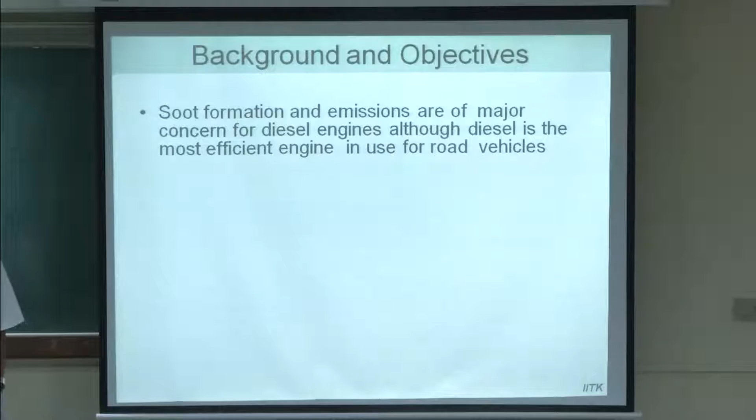You must be hearing or reading in the papers that the Supreme Court banned diesel taxis, and earlier they banned registration of new diesel cars in Delhi. So there is something real and something kind of paranoia about diesel engines, that they are so bad that you have to ban them. And the major consideration is the particulates or emissions.

Soot is of course combustion generated, but the total particulate structure is a little different. A lot of other things get absorbed due to condensation as the temperature of the burned exhaust gases decreases. So hydrocarbons, including some sulfates if the fuel has got sulfur, they all get condensed on the soot core, and that is what we call particulate - the pollutant which the public is exposed to.

But diesel is the most efficient engine available today to the people. Some of you who are aware of engines know its brake thermal efficiency of about 45% is supposed to be very high. No other engine has that kind of brake thermal efficiency. But you would be interested to know that some super heavy truck engines are being developed in America.

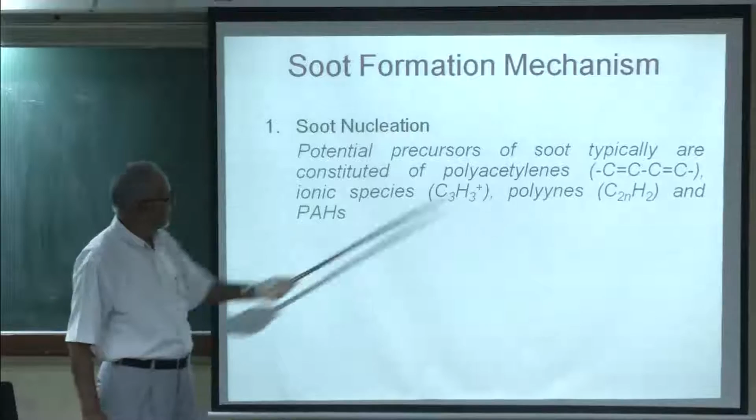So that has to form, and the potential precursors for that are typically polyacetylenes - this structure. Then species like this, many species, polyynes, and also polyaromatic hydrocarbons. Polyaromatic hydrocarbons are, say, more than 2 benzene rings.

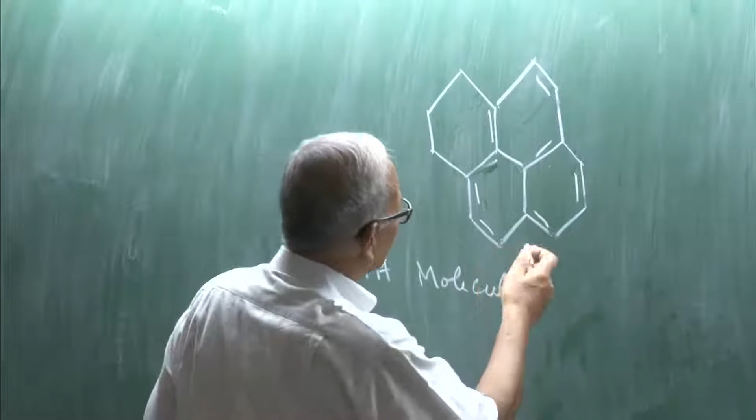So this is one typical PAH molecule. You have to have the benzene ring structure, with benzene rings fused together. Inside you will have only carbon atoms, and only outside do you have hydrogen attached. So when a few hundred rings like this are fused together, it forms the nuclei. But that's one theory, and it has been seen that some studies produce this kind of particle.

The next stage is coagulation. These nuclei, at high temperatures of more than about 3000 to 3500 degrees Kelvin, are in a semi-solid state, so they can coagulate together - two semi-solid particles coming together, and then they coalesce. So that's one stage.

Then the third stage is surface growth. Having become a nuclei, a couple of nuclei fuse together to make a little bigger particle. Now this surface grows, meaning more and more material is deposited on it. The proposed mechanism is the HACA mechanism - hydrogen abstraction and C2H2, meaning acetylene, addition. This mechanism has been proposed as possibly the most prominent mechanism for surface growth.

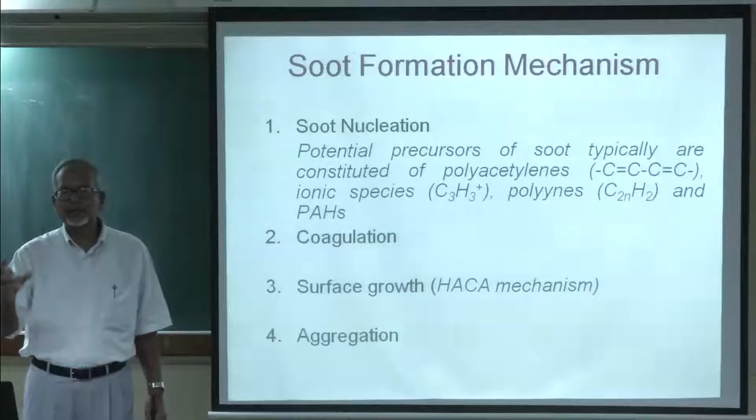Then the next stage is aggregation. Now these particles, called primary particles, may be anything from 15 to 30 nanometers in size - from a nuclei that has grown through coagulation or surface growth, and becomes a stable primary particle. It can be independent, or they can also aggregate together, a number of them, maybe 30, 40, or up to 100 particles. These together are known as aggregates.

And then, if the temperature of the gas is high - in diesel engines or even in leaner flames, excess oxygen is always available - so the soot can also oxidize, or it does oxidize. So this is the other mechanism which, in fact, continues throughout the process.

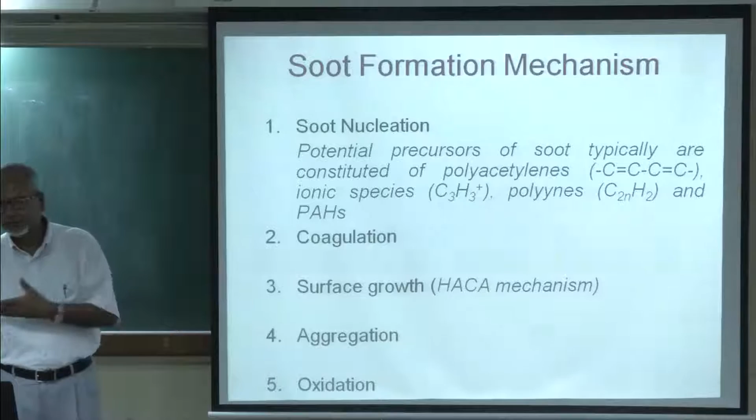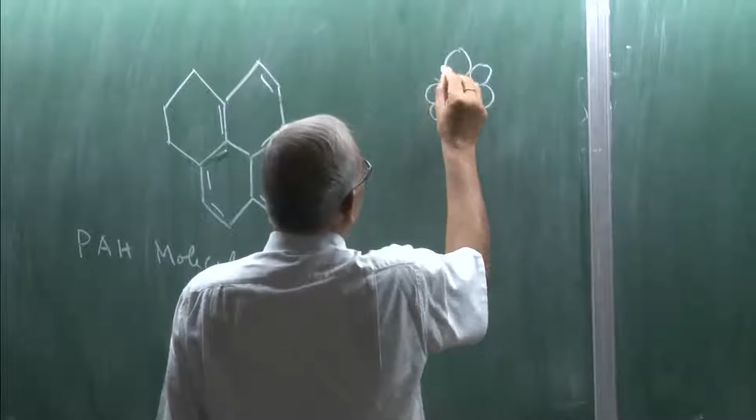We will discuss that physically you obtain a structure like this in the soot, and note that these particles should be aggregating something like this. In soot you don't get this kind of aggregation. It's chain like.

What is the HACA mechanism? Briefly, it is composed of 3 steps. First reaction is that a hydrogen atom is removed from an aromatic molecule, say suppose you have benzene in the high temperature region.

You have now the course of combustion, and so many softwares you must have been talked about, or some of you might have been using Chemkin and whatnot, that in the high temperature region of combustion of hydrocarbons and air, you have a lot of radicals and also atomic hydrogen, atomic oxygen, atomic nitrogen. These all chemical species are present.

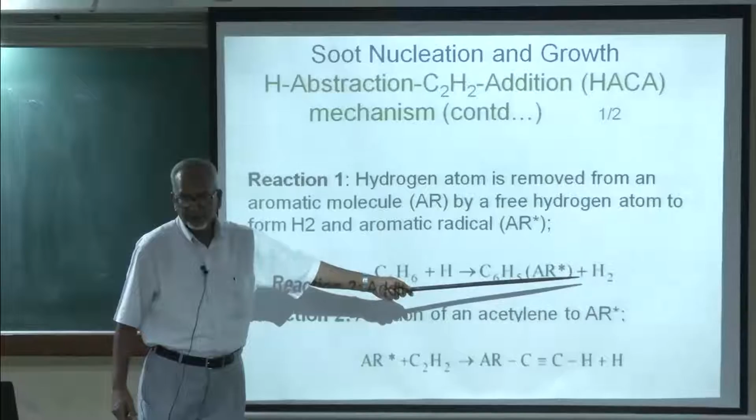So this, for example, atomic hydrogen reacts with benzene, strips one hydrogen atom from here, forms a radical. This is known as aromatic radical, or can be aryl radical, and then molecular hydrogen - this is the first step.

Second step is this aromatic radical combines with acetylene, which is formed due to cracking of the fuel molecules in combustion, and forms a substance on the side chain of the benzene ring. You will have acetylene attached, and again it releases the hydrogen atom.

So this can keep on being used again for further step 1, reaction number 1. Then the third step is that this can - you have this formed, then this is added with another acetylene molecule, another one, and then forms another ring, on which this site has a valency available, and further aggregation or further deposition starts here.

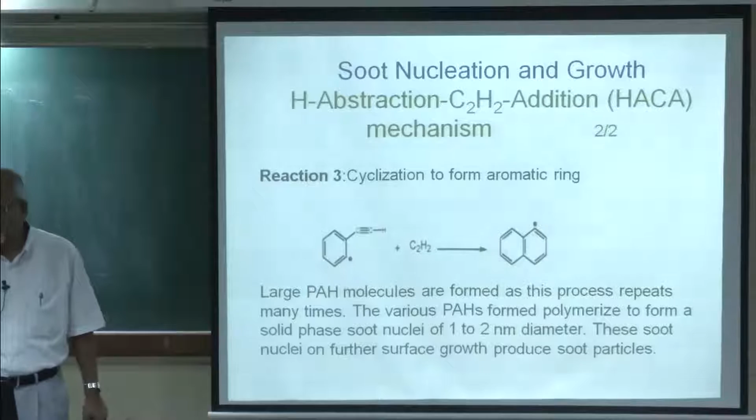So these are 2 benzene rings, then 3 and 4 and 5 and more. So PAHs are formed, and these PAHs when they become larger and larger molecules, then this becomes the soot nuclei. This is the mechanism known as the HACA mechanism of surface growth.

Other things are more mechanical in nature and not chemical, like coagulation and then aggregation. Those other 2 steps are more like mechanical in nature, that okay, 2 semi-solid substances when they collide, then you can call it at best physical chemistry, or physics.

So they collide together and form one entity, and once they get a little solidified, then aggregation happens only - one attaches to the other, then a third attaches, then a fourth attaches, and all that, forming a chain. Once they become stable and temperature comes down.

What does the oxidation mechanism consist of? It has been hypothesized that oxidation of soot can happen by molecular oxygen, or also atomic oxygen, which is present in the high temperature gases. But it has been seen that oxidation by OH radical is very important in the fuel rich regions, and when you have diffusion combustion, whether diffusion flames or in appliances like gas turbines or diesel engines, or now GDI engines also, there are rich regions, and in that rich region hydroxyl radical is available in plenty, and it has been seen that this plays a very, very important role.

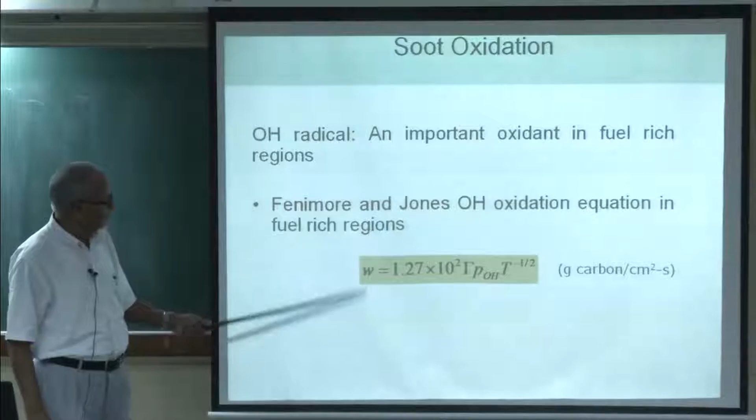Fenimore and Jones gave this equation for W, the rate of oxidation, in grams of carbon per centimeter square of surface of the particles per second. This is expressed like this. Other mechanisms also have been given. We will compare them, to see how the different mechanisms predict the oxidation rates.

It has been thought or proposed that when hydrogen is added to the fuel, then there is a possibility that there will be more hydroxyl radicals present in the combustion gases, and then that can promote a higher rate of oxidation compared to when the fuel is there without additional hydrogen. So whether that is true or not, we will see.

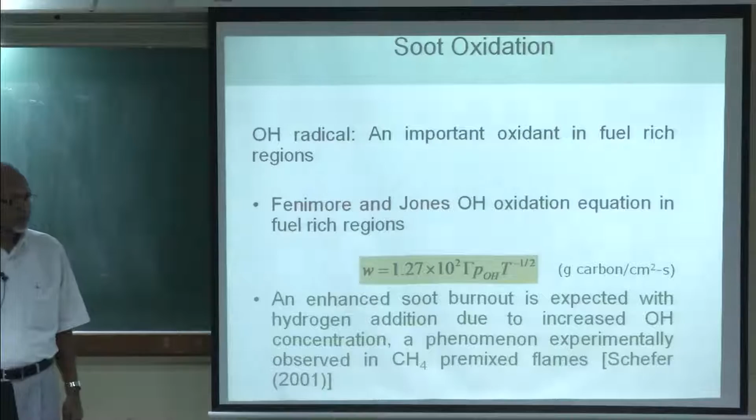This has also been observed in, for example, methane air flames, that in the flame region, at a certain stage, somewhere in between where the flame starts, there is a high concentration of hydroxyl radical. Techniques like chemiluminescence have been employed to detect the concentration of hydroxyl radical in combustion zones. As the flame height increases, the hydroxyl radical concentration reduces, soot density also reduces, and hydroxyl ion concentration also reduces. So this is corroborative evidence that hydroxyl radical plays an important role.

Basically, three mechanisms have been in vogue. Anybody deals here with diesel engine combustion? So you must have been exposed to the soot oxidation NSC mechanism, the Nagle-Strickland mechanism, from a long time back, around 1968-70, for oxidation of soot formed at that time. In fact, carbon soot is also an industrial product -- it is manufactured using petroleum substances. You form the soot and sell it for industry, wherever it is used.

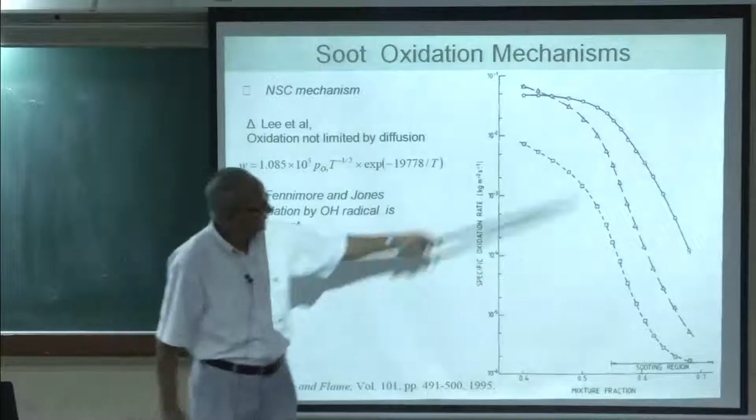And then Fenimore -- I told you he took hydroxyl radical. They are all taking only oxygen, both the NSC mechanism and Lee mechanism, using only oxygen as the oxidant. But Fenimore and Jones use hydroxyl radical. You can see here these rates: this is NSC, this is Lee, and this is Fenimore-Jones. The oxidation rate is on a logarithmic scale, so this is a pretty high difference -- hydroxyl radical predicts a much higher rate of oxidation than the usual NSC.

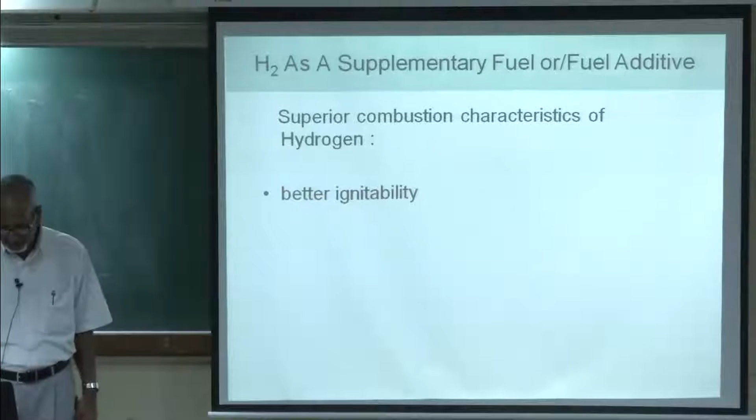I have already talked briefly about why supplementary fuel people were interested in hydrogen, or as an additive -- it has superior combustion characteristics: better ignitability, high diffusivity, it's a small molecule, high flame propagation speed, much higher than hydrocarbons, and very wide flammability limits. So it is supposed to promote combustion at a much higher rate than hydrocarbons.

Let us see how addition of hydrogen affects the flame temperature. It has superior combustion characteristics, so it should increase the flame temperature. This is the work of Du et al. from 1995 -- he used hydrogen and other diluents, inert gases like nitrogen, argon, helium, and carbon monoxide. Carbon monoxide is not an inert gas, but the other three are, and then he measured the flame temperature at different stoichiometry.

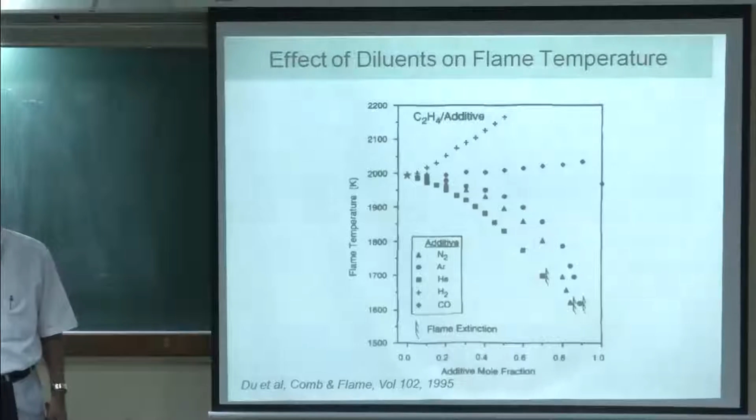They measure how much you are adding the moles of these products to the flame. So here is hydrogen and this is carbon monoxide. Carbon monoxide being reactive, it also has higher flame speed, so it also increases temperature, but it does not maintain it - even if you add more carbon monoxide, temperature rises only slightly. With hydrocarbon, if you add more hydrogen, temperature increases very sharply, and all other gases work as diluents. More and more inert gases you add, temperature comes down. So you see hydrogen has a very positive effect on flame temperature, meaning it increases flame temperature, so oxidation should be more - is this a natural phenomena?

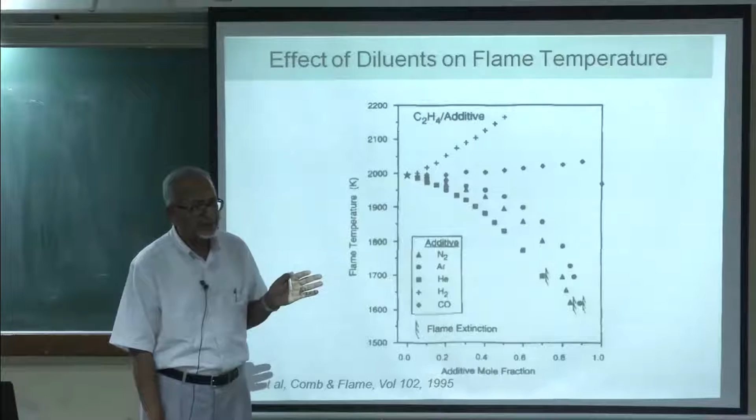No, it is already there. You see, it is like this - when you do this work, carbon concentration is kept constant, carbon and oxygen concentration kept constant. It does not change, you only add - say for example, you replace nitrogen. You keep the basic stoichiometry the same, only you add them additionally. Otherwise it will all make no sense.

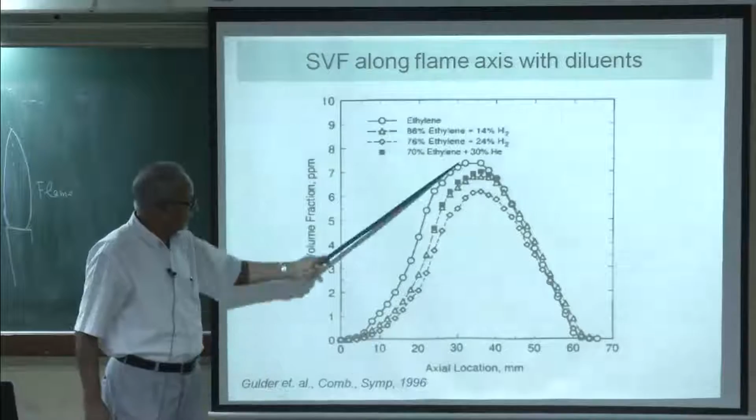You can see here that ethylene is measured along the flame at the axis - if you have a flame, you measure along the axis. So you see here the peak concentration - this is when you have ethylene and hydrogen, and this one has more hydrogen, this is hydrogen smaller, and this is helium. Helium, of course, is not doing anything - no reactions, it is an inert gas. But if you add helium, it's still lower than pure ethylene. With hydrogen, if you add hydrogen, there is a fairly significant reduction in peak concentration of the soot.

What could be the effect of hydrogen? Possible effects are dilution, thermal, and direct chemical interaction. The dilution effect is that when we are adding hydrogen, the gases are being diluted, meaning concentration of hydrogen in the stoichiometry is increasing. Suppose you have CH4 fuel or C2H2 - in one case every carbon atom is attached with only one hydrogen, like acetylene, but methane has 4 hydrogen atoms for every carbon atom. So this is known as the dilution effect, diluting the carbon concentration itself.

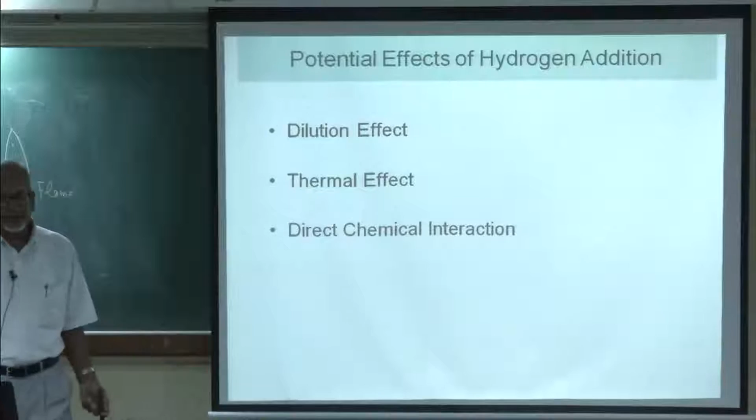Is that the effect, or is it the thermal effect - meaning, because high temperatures are obtained in the flame, can it increase the oxidation rate due to temperature alone? And chemical interaction is that you produce more hydroxyl radicals or more hydrogen atoms. More hydrogen atoms means - does it accelerate soot growth due to the HACA mechanism, or does more hydroxyl radical increase oxidation? Net effect - that is the chemical effect. So these are the three effects, three ways it can be predicted. Basically, the thermal and direct chemical interaction effects are supposed to be the dominant effects, not the dilution effect.

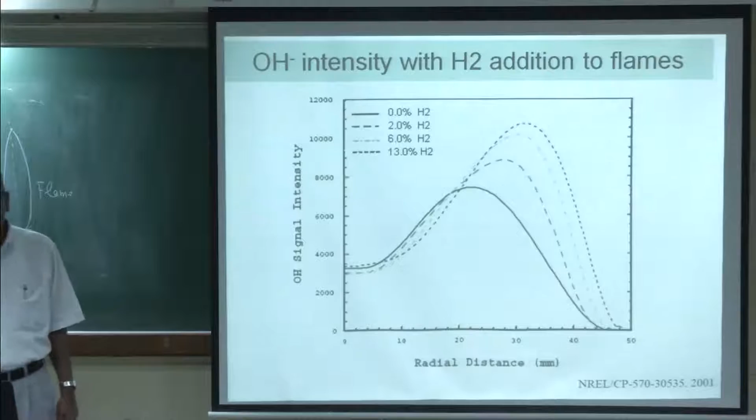We have been talking about hydroxyl radical being important - can hydrogen increase the concentration of hydroxyl radicals? These show some measurements of the hydroxyl radical signal intensity at different percentages of hydrogen added to the system by volume, the whole volume. So this is no hydrogen, and here hydrogen is increasing. You see that in the flame, hydroxyl radical concentration increases as you add more and more hydrogen. So that has been shown to be true - adding hydrogen does increase hydroxyl radical concentration, and the Fenimore and Jones oxidation mechanism should now be dominant.

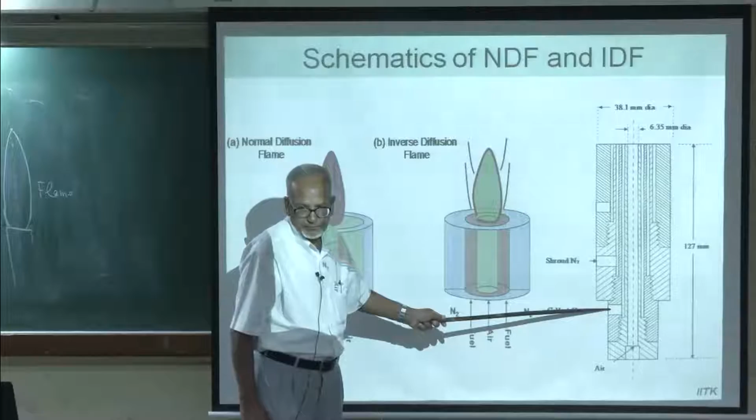Here is the fuel, surrounding air goes through a surrounding hollow ring, and outside it is a nitrogen shield, so that it is not influenced by atmospheric oxygen. If you don't put a nitrogen shield around the flame, then atmospheric oxygen would also be interacting. So, to mask that influence, in these studies a nitrogen shield is also put outside.

So, this is normal diffusion. Most burners would be like this. The inverse diffusion flame is where you put air inside and fuel in the surrounding ring - air inside and the fuel around it, with the nitrogen shield.

So, what is the difference between the two? Here oxygen is diffusing into the flame from this side, and the flame is concentrated - all the products and combustion gas are concentrated here, soot is also concentrated here, and then it rises and the soot gets oxidized. As it rises, soot gets oxidized, and then it starts cooling, and oxidation stops. Then the flame gets terminated here.

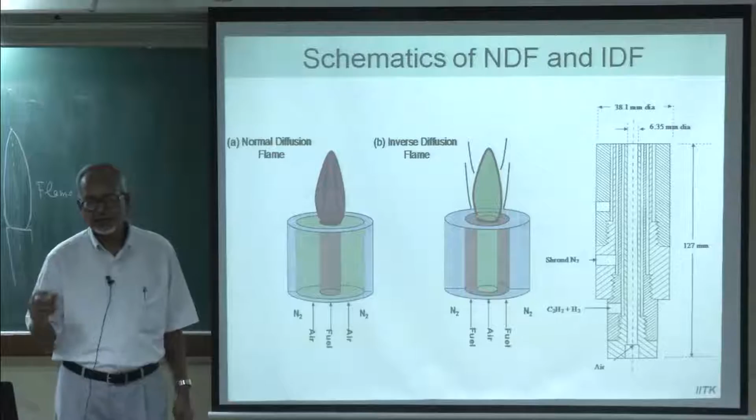So what do you get? That most of the particles - if you study along this line, say we make a study along the center line like this, along the center of this ring - center meaning midway in this hollow ring - along this study we look at, for example, soot structure, soot volume fraction, and these will differ.

So the particles coming out from here would be just freshly formed. From here there will be some that are a little midway, and so on. So you can see how, along the length of the flame, particle size is changing - from the incipient particles initially formed, and onward.

So inverse diffusion flames are good to study the combustion of soot, or soot formation early in the flame. You get a better idea than with the normal diffusion flame.

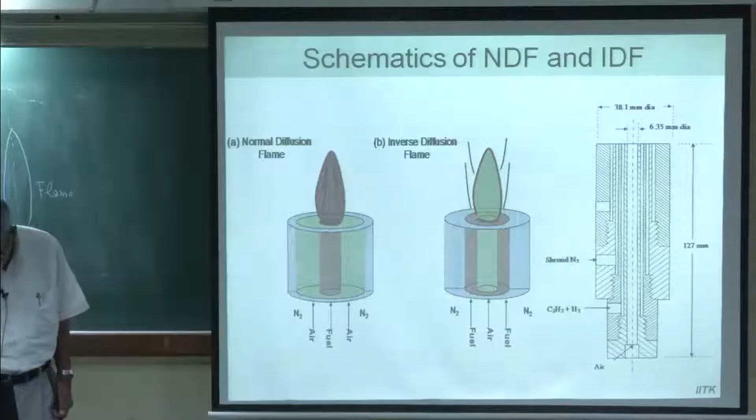These are pictures - this is what the inverse diffusion flame looks like, a little broader all through, because air is coming from the center and then diffusing outwardly. And this is the normal diffusion flame, which is more conical - this one is more conical, and this is something like cylindrical.

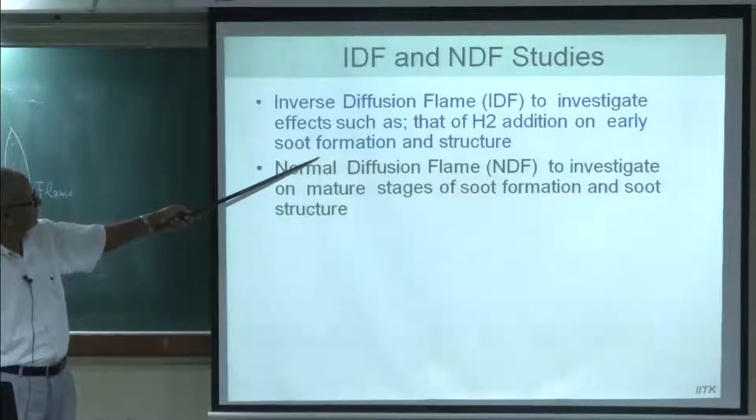I have already talked about this now - that is for initial particles and structure, while this is for the mature stage of soot formation. Okay, I already discussed that.

What we studied here: primary soot particle size, soot volume fraction, and aggregate size - how big these particles become, and does hydrogen influence them in aggregate size. And fourth is fractal dimension - does it change the nature of the aggregation?

It is not like it's a chain-like formation, not something like this - no, this is not observed. But does it change, and to what extent? So these four basic structural parameters were studied.

What kind of technique was used? There are several techniques - starting from what diesel engine people know, the study on soot formation started long ago, something around 1963, '64. There was that classic research by W.M. Scott.

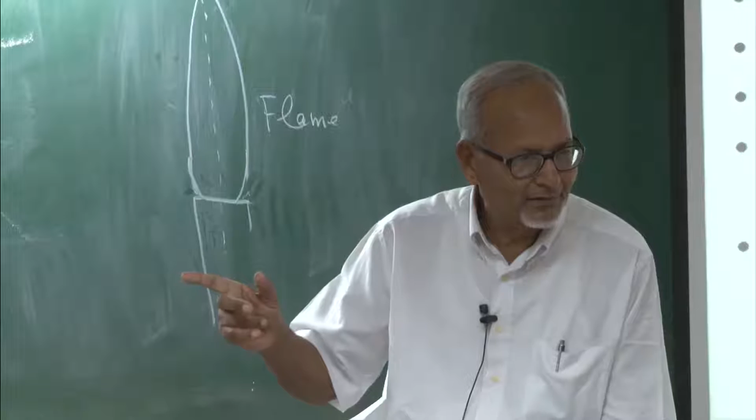It's only that what you get out is the result of what was formed right in the beginning, and what gets oxidized. That was his very significant observation.

You can call it qualitative now, but you see the amount of effort that man would have put in. In fact, he concludes his paper by saying that his situation was like a pelican - a bird that has bitten off more than it can chew. There was so much film exposed, miles of it, and the question was how to analyze them - so he said, I have bitten more than I can chew.

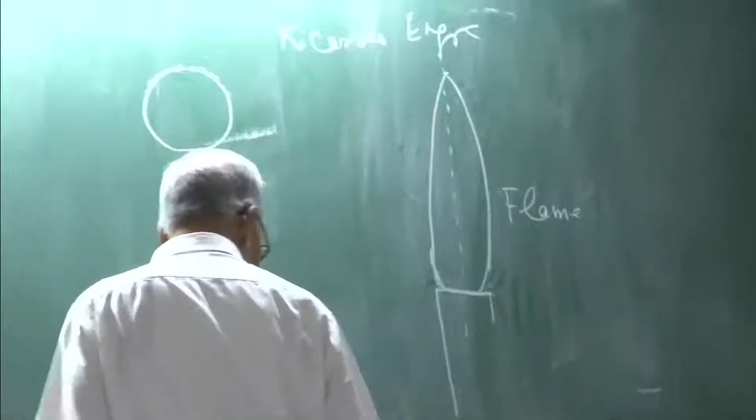So this started from that, and as the technology kept improving, right in the late 90s or mid 90s, Sandia Labs - there's the famous Dec and colleagues - did research on diesel engine spray combustion using an optical engine, and reversed a few things that people had earlier thought of.

His findings were exactly the reverse. One of his findings was that soot nuclei are formed in the pre-mixed region - we always talk about soot being formed in diffusion flames, in the rich pre-mixed region. Of course the concentration is high on the diffusion flame boundaries, that's where the highest concentration is, but the formation happens right in the premixed region.

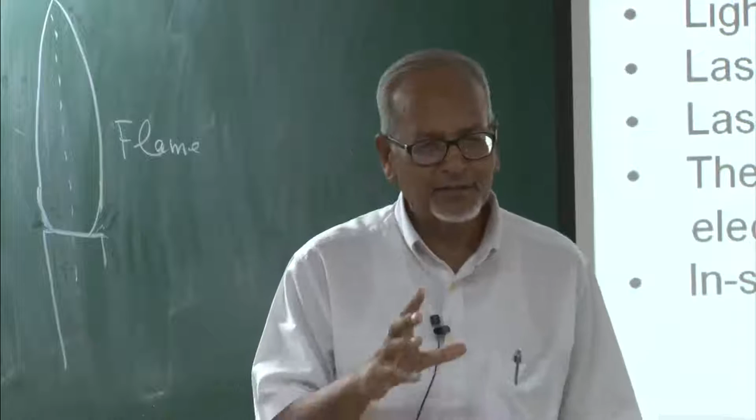That is a very significant finding. Some people had a difference of opinion, saying maybe this is the behavior in highly turbocharged, supercharged engines, but may not be true in naturally aspirated engines. But anyway, now we only have what you call supercharged engines, so Dec's findings still remain important.

So there are different techniques, like laser induced incandescence. There's also light extinction, scattering, laser induced fluorescence, thermophoretic sampling - these are several techniques. This uses laser, uses optical engines, so you can use that, or you can use flames also.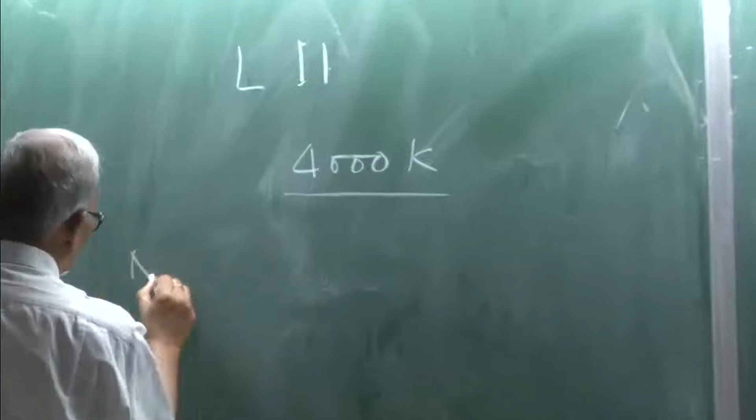This technique is basically that when laser is focused on a region of the flame, the laser increases the temperature of the soot particles to about 4000 degrees Kelvin - that's LII. While the particles which are not heated, the temperature would be something of the order of non-laser heated, around 2200 Kelvin or so.

So these particles would have different radiations - the frequency would be different, and the decay from there will be different. So from the fundamental laws of physics, you see how much time it takes to heat, and then how the heat is decaying - this will depend also on the surface area and on the size. Surface area would depend on size and numbers.

So from that back correlation, you determine what would be the particle size and what would be the soot volume fraction, average particle size, and what would be the soot volume fraction.

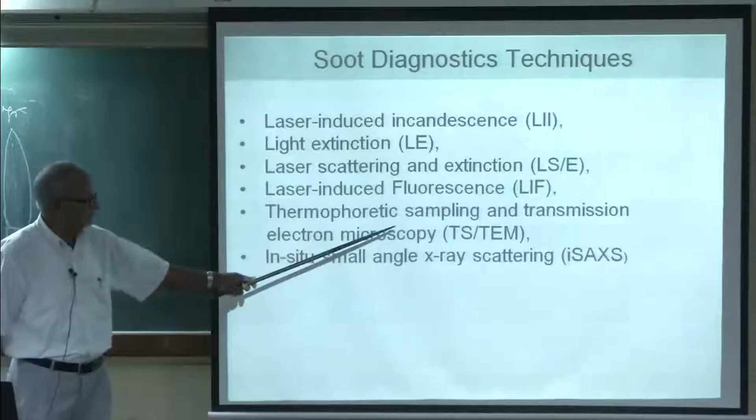So that technique, laser, this is of interest: thermophoretic sampling, which we use coupled with transmission electron microscopy. This is a non-intrusive technique. No, this is an intrusive technique, where you physically sample the soot particles from the flame.

Then you take it to the electron microscope, scan it, and with electron microscopy you scan those images and then analyze that.

So this is another technique which can be applied to flames. This cannot be applied to diesel engine combustion. You cannot introduce a sampling method and take it out. Say, from a diffusion flame, if I am basically taking out particles at some location.

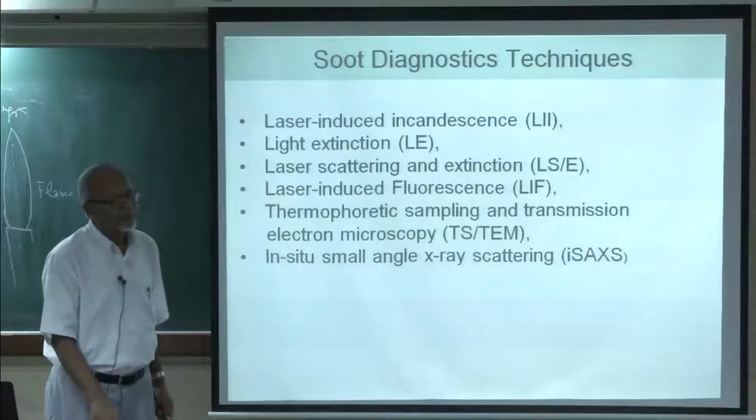So it will get cooled, so the composition and structure will be the same when I take it to experiment. That is the technique's fundamental principle: the temperature difference creates a potential, so that these particles drift to this colder surface and get stuck to it, and then you remove them immediately.

I will explain that. That's an interesting question, the fundamental principle of that. Let me just show.

So this is the thermophoretic technique, with this cooler temperature probe. The theory is that in a hot region, if you put a cooler collecting probe, then due to this there will be a potential generated, and these particles drift and get deposited on that. This shows you can search and find out what the potential is and all that.

Then once you have that, you combine it, take the photograph from the electron microscope, and then you can get all this information.

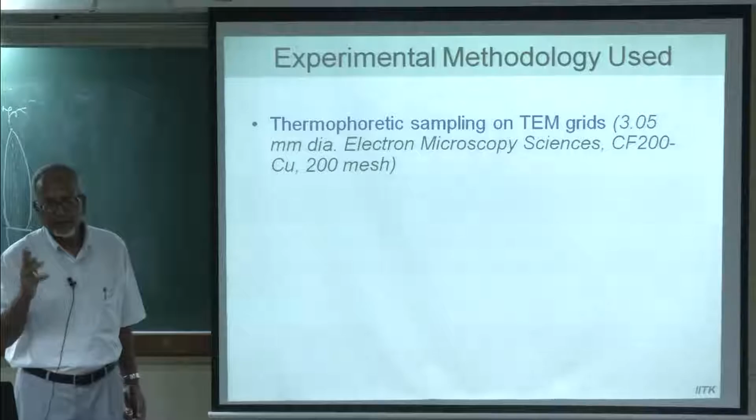Let us see - there are TEM grids available, about 3 millimeter diameter, 200 mesh, 200 cells per square centimeter, very very small grids, made of copper coated or copper wires. This is sampled from the middle of the reaction zone along the flame height.

Sampling time is kept from 45 to 80 milliseconds. That is important, because if you keep it for a longer period, there are two problems. One is that multiple layers of particles would be deposited, and the chances of multiple layers being deposited increase, and then you will not be able to get a good photograph.

In the electron microscope, if multiple layers are there, then you cannot individually identify either the individual particles or individual aggregates. The other thing is that if it stays for too long, it gets heated, so it does not serve the good purpose. So you have to have a very small period. It has been seen that if the probe remains only about 45 to 80 milliseconds, then you get the best results using this technique.

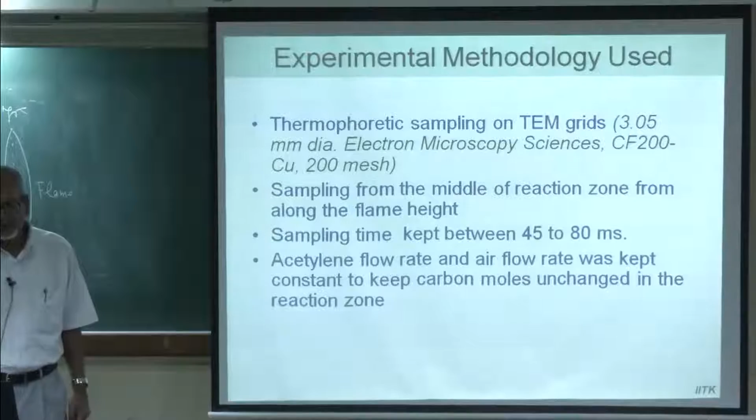As I already told, in these studies you keep the acetylene rate and air flow rates such that you keep the same carbon density - carbon density per unit volume of the gas remains constant, so that it is not that I am putting hydrogen or additional diluent and reducing the carbon density, because then I would get a lower soot volume fraction.

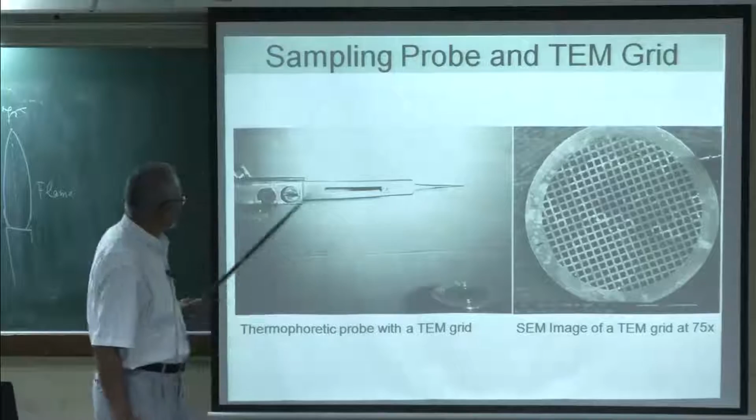This shows a tweezer, and on the tip of this is held the grid. This is the enlarged view of the grid. The tweezer is held on this, and is operated by a double acting solenoid valve, this double acting pneumatic cylinder.

Using an air compressor and a timer on this double acting cylinder, the tweezer goes to the middle of the flame and then is pulled back. The time is recorded and calibrated on an oscilloscope, using the right amount of air compressor pressure and the timer setting, so that it remains inside only for 45 to 80 milliseconds.

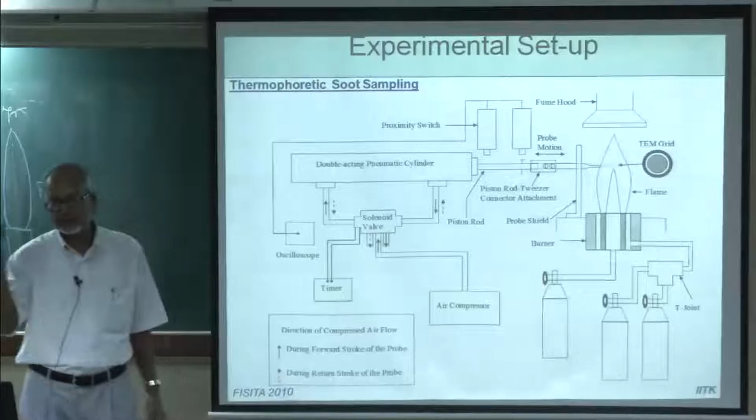And along the height, the probe was made to traverse, and these samples were drawn. They are all for the fuel through the burner, supplying the acetylene, air and hydrogen, with the surrounding nitrogen shield to protect it from atmospheric oxygen.

You can have, say, if you are interested in more details, a paper - I am taking our paper. There must be a number of other papers as well. This is in Combustion and Flame, March 2007, volume 148. This is Pandey and Panigrahi.

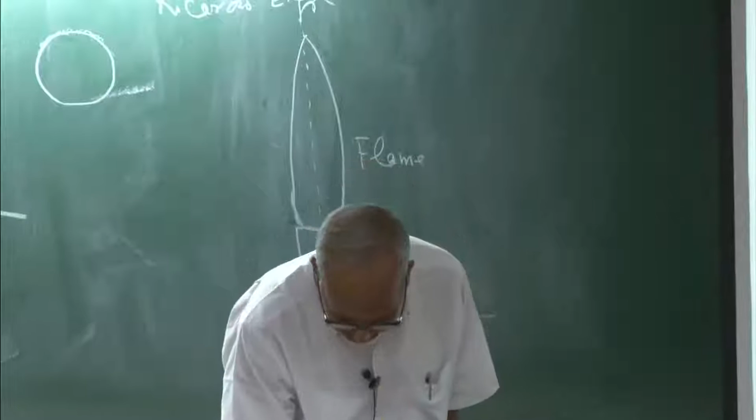So if you want more details on this, you can see that. Other parts also I would mention - this is only for the sampling system itself, how you record its operation time and calibrate it, what kind of air pressure you should use, and all that.

Then you take the photographs at 8,000 magnification, 15,000 magnification. For soot volume fraction, you can have the photograph which are not so enlarged, but for particle size, the photograph at 80,000 magnification, to see the individual particles. There are softwares available for image analysis.

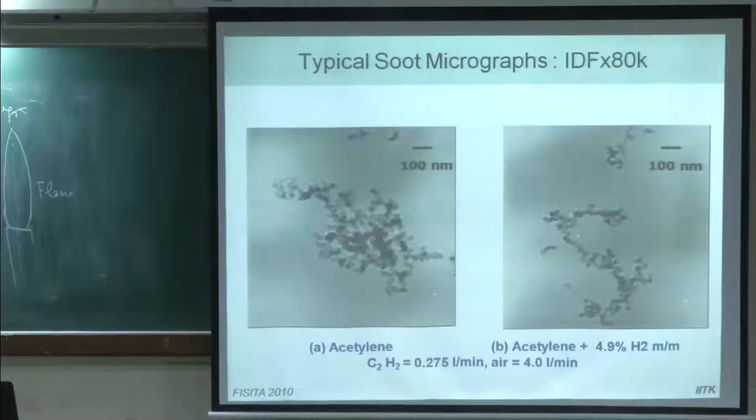For individual particle size, it was done physically - sitting with the photograph and using a microscope, you measure individual particles. For example, you can separate independent particles. So you locate such independent particles, maybe 10 or 15, measure their size, and then take the average. So individually you identify that, and that gives the average particle size - that was the primary particle size measurement method.

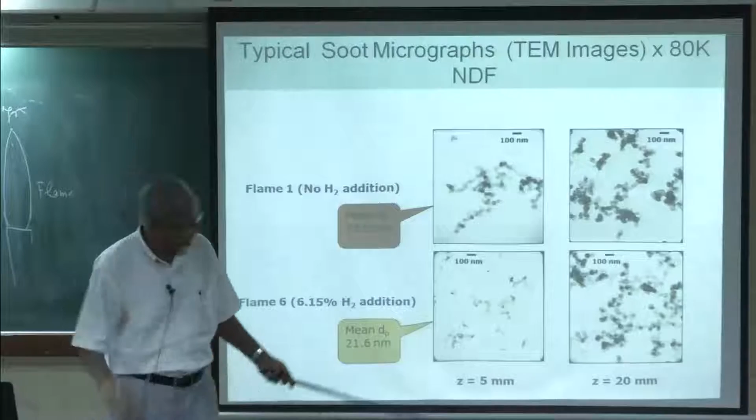You see here for NDF - this is with no hydrogen addition, and here is with hydrogen addition. You can see at two different heights, shown at 80,000 magnification for NDF. Here at 5 millimeter height, meaning the flame just at the beginning, and at 20 millimeter height you can see that concentration is increasing, is growing - SVF is growing.

Particle size - we will see the particle size also getting a little larger. From 5 millimeters you can see into the particle, you have the impression that the particles are somewhat larger, if you can see individual particles, and density of soot in any case has increased.

So these kinds of photographs were taken and then analyzed. This shows the temperature profile in the flame with time - how temperature recording is done, because you have to measure the temperature for analysis of the soot volume fraction. You need to know what the flame temperature is.

So you also have to measure the flame temperature, but you cannot put a thermocouple there all the time, it will disturb the flame. So you measure again along the height - you put the thermocouple inside, then bring it out, go to a different height, measure temperature, then go to a third height.

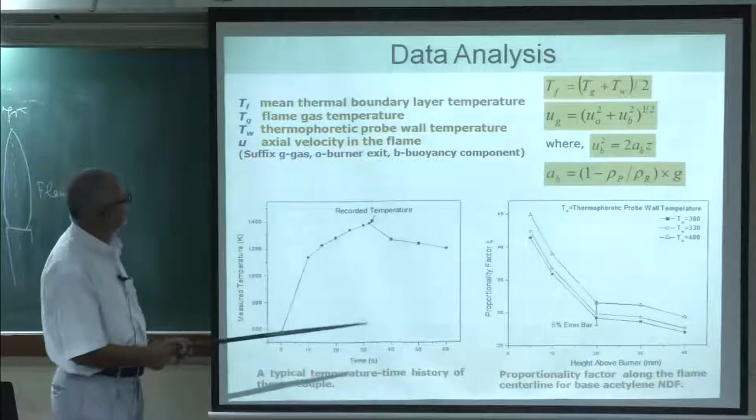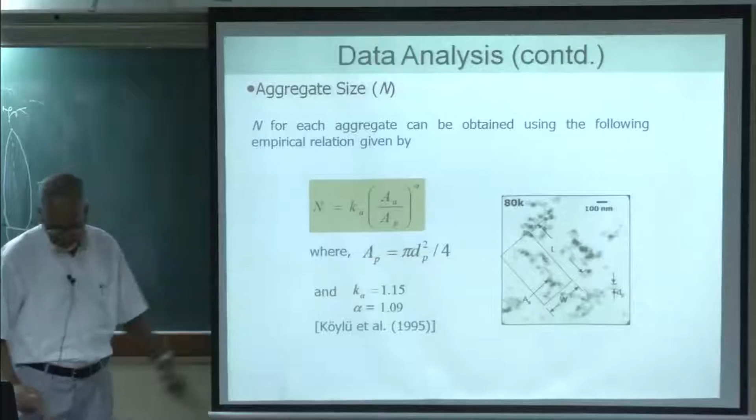I will not go into this, it has also been covered in this paper, how do you calculate the aggregate size. Number n is the number of each aggregate, and aggregate size means number of primary particles in that. This is all explained there, simple mathematics, soot volume fraction, how do you calculate it, the aggregate size.

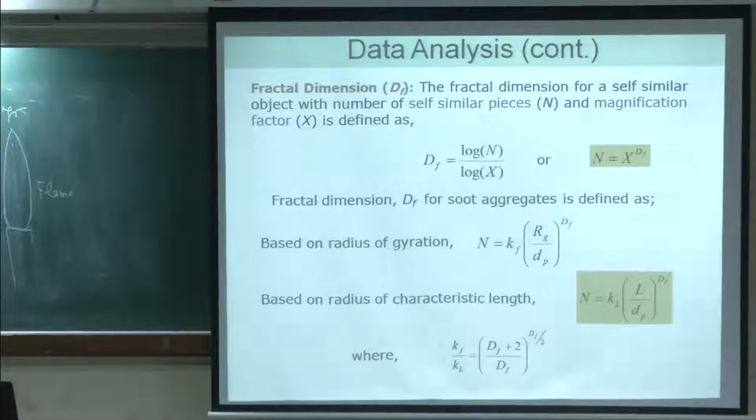Then fractal dimensions. Fractal dimension is basically a measure of how round the object is, like its volume and surface index, volume by surface index. For example, for a sphere the fractal dimension is 3, for a cylinder it is 2. So that tells what kind of structure it has got - whether it's roundish, or cylindrical, or not, like a chain. So that's the basic.

So this I will not go into now. Let me talk about some results.

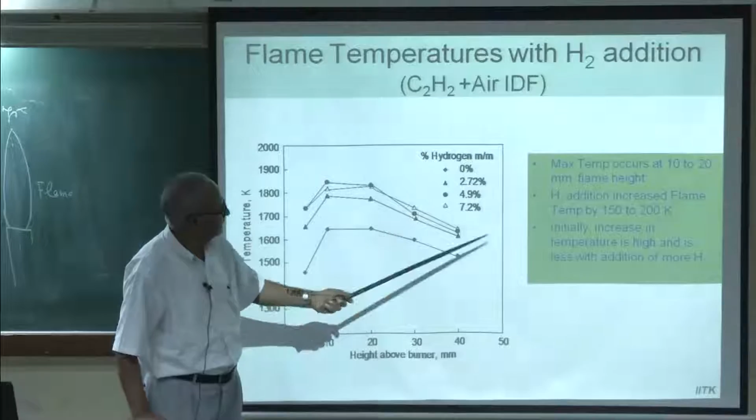So that's one. Maximum temperature is anything from about 10 to 20 millimeter height of the flame, and then it starts decreasing, 150 to 200 degree Kelvin higher temperatures. Initially, of course, a large difference, then naturally gets cooled. So maximum temperature difference is around 10 to 20 millimeter height.

For NDF also similar behavior, maximum temperature difference about 200, increase in temperature is somewhat lesser. This is like 1500 or 1650, so about 100 degrees. So here the temperature difference is less, meaning the temperature increase is less with hydrogen in NDF.

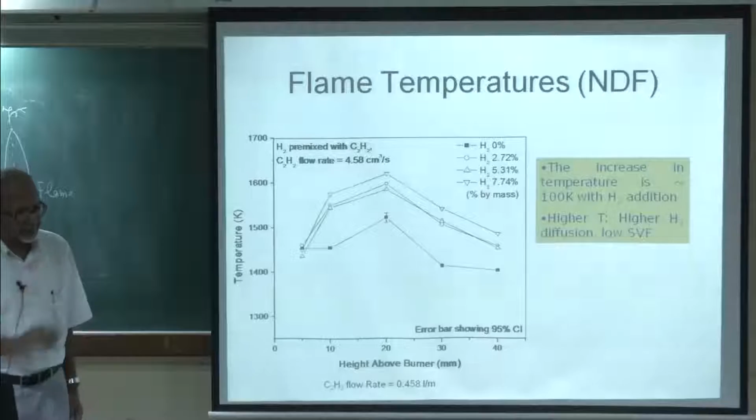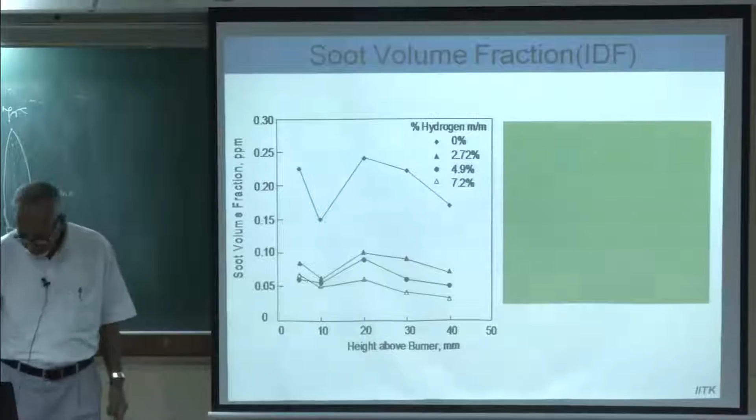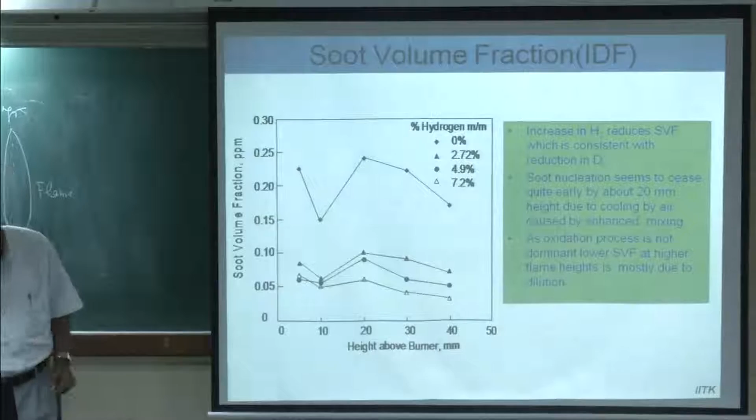NDF maximum concentration shows a sizable difference. One thing you see here, soot volume fraction in IDF maximum is about 0.25, and in NDF it's almost 5 to 6 times higher, because here the particles come from the core then move outwards, since in IDF the air is in the center. This takes out the particles so they don't grow further, and whatever nuclei are formed in the beginning, further nucleation is also reduced. So the soot volume fraction becomes fairly low.

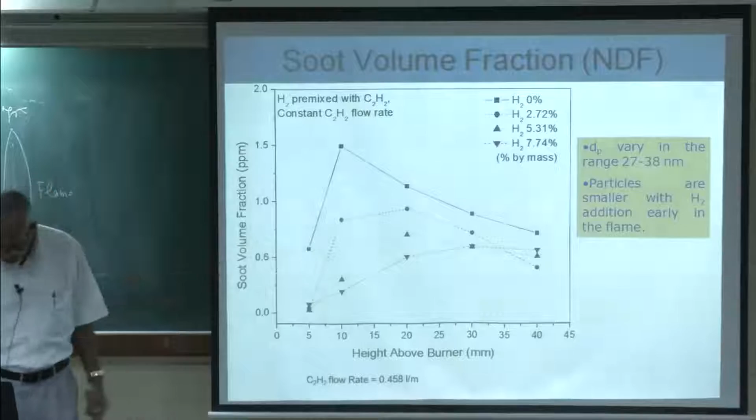Here the hydrogen effect is there, but the difference is only about 1 to 3 maximum, 0.5 to about 1.5. There is a higher ratio, about 1/5 or 1/6. Here it is about 1/3, lower soot.

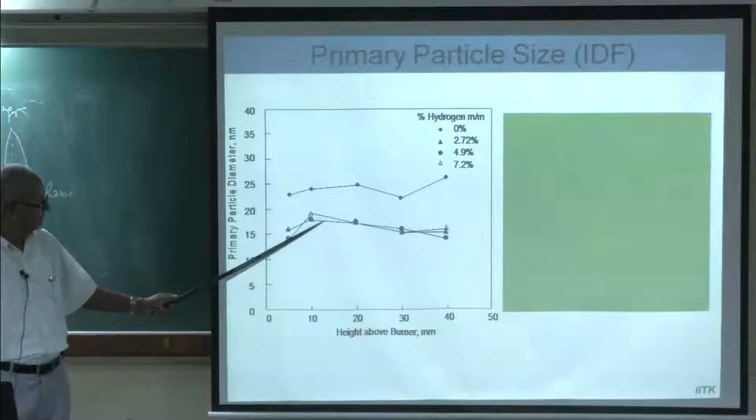Primary particle size - without hydrogen about 25 nanometers, and with hydrogen about 15 to 20 nanometers. So particle sizes are smaller with hydrogen, so this suggests reduced growth.

That's possibly not the reason though, because other evidence supports that it possibly increases oxidation, since temperatures are higher, about 100 degree Kelvin higher. That increases the soot oxidation. Other appliances also give corroborative evidence - for example, in a diesel engine, any measure you take to increase combustion temperatures, like advanced injection timing, will reduce soot and smoke, though it will increase NOx. So that is basically the temperature effect.

So here I already told you 12 to 20 average particle size, and with hydrogen it's much smaller particles, so it reduces particle size, and the oxidation, as I told you, is more important.

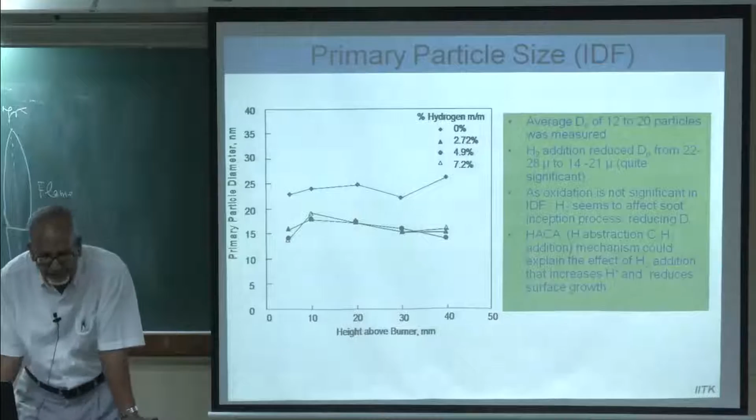I took the result of NDF because in IDF oxidation - that's the reason why both IDF and NDF studies are important - because in IDF, oxidation is reduced, the possibility of oxidation is reduced, since the particle is made to move outwards into a temperature zone which drifts to a lower temperature.

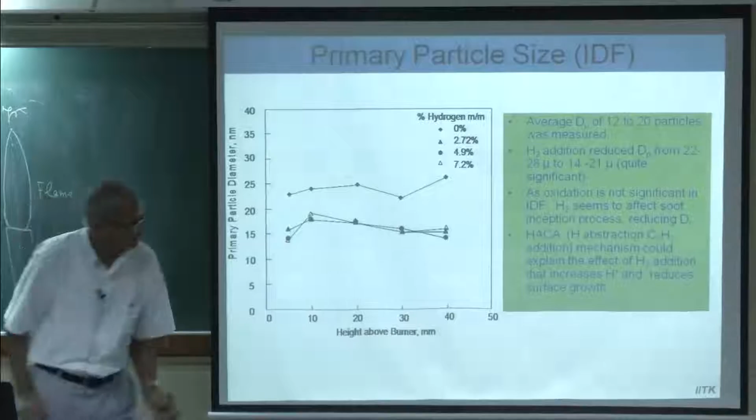So that means there must be something to do with the surface growth. Hydrogen addition can also affect the surface growth, as this reduces surface growth. Temperature is lower, so oxidation is not promoted. So this result must be due to lower surface growth due to addition of hydrogen.

So IDF studies support that hydrogen also curbs the surface growth of the soot particles.

In NDF, all the particles remain in the high temperature zone, because we are moving all along the fuel - the air is outside and fuel is inside. So all the particles continue to remain there, so they are all subjected to surface growth as well as oxidation. So it results in hydrogen curbing surface growth, but since it remains in the high temperature region, oxidation is also very prominent here. So you are not able to distinguish whether hydrogen is supporting particle growth or not.

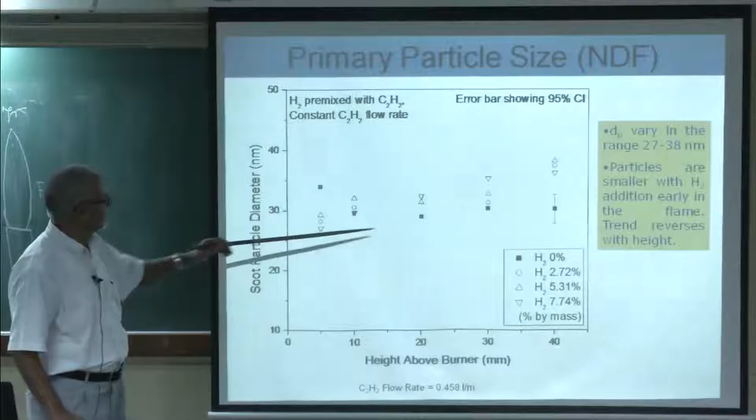So individual particle size is not affected - they are practically the same size. Very, very little difference, not that dramatic as in the IDFs.

What about the aggregate size - the number of primary particles in an aggregate? Basically very little difference. There are fewer particles compared to without hydrogen, but the difference is not very dramatic. In IDF, at least there are some differences - about 4 to 5 particles fewer, and aggregate size is also smaller.

If you see NDF, for example - in IDF, because the particles are flowing out, agglomeration is less.

Rate of aggregation depends on the collision among particles and is proportional to n square. So if the number of particles is less, the aggregation also would be lesser. So that's one reason for smaller aggregate size in IDF.

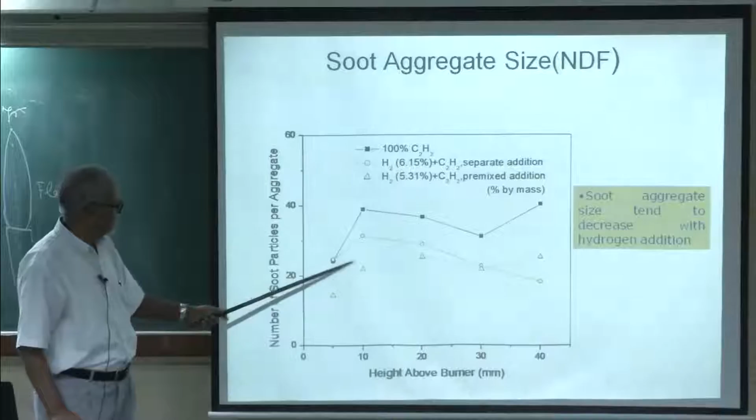Here we said 10, 15 particles in one case, here it can go up to 40, mostly 20 and more. So their aggregate size is larger in the NDF than the IDF.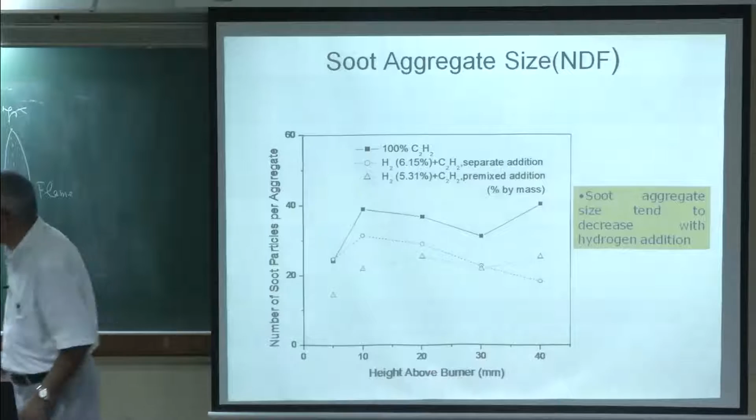With hydrogen, aggregate size is also smaller, and the reason is not too specific - I think it should be more a function of n, the number of particles or particle density per unit volume. With hydrogen, as we have seen, because the soot volume fraction is lower, the rate of aggregation is also reduced. So this is the indirect effect of hydrogen - it has to do with collision frequency and all that.

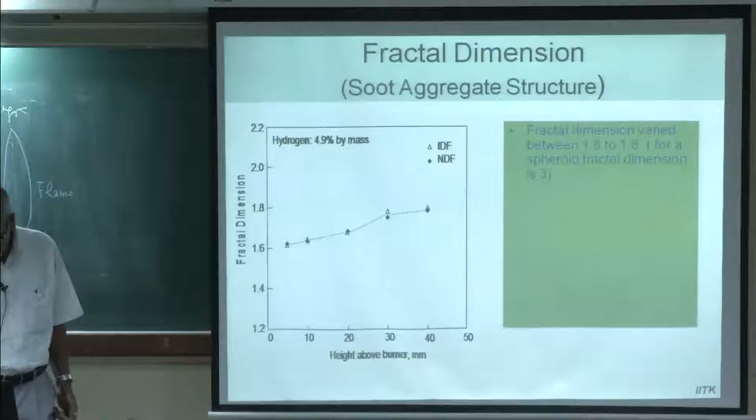Just to give an idea, what we get for the soot, whether IDF or NDF, along with the flame height, is something like 1.6 to 1.8 - you can say average about 1.7. So hydrogen makes no difference in the fractal dimension, the nature of the aggregate. It makes a difference in the size of aggregate - size is smaller, but not the nature.

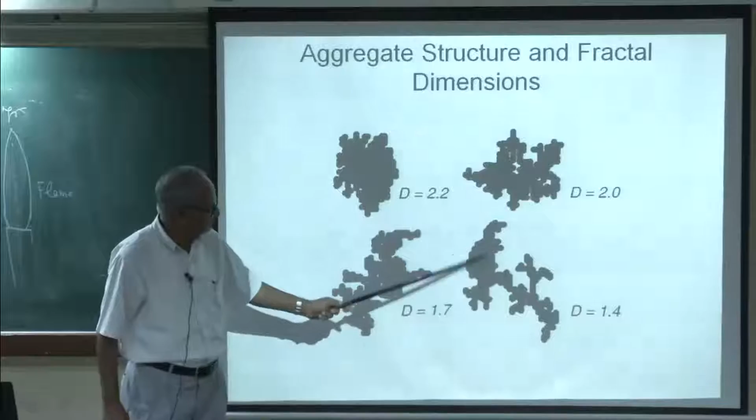As you have seen in those micrographs, they all look like chain-like structures - the sample micrographs I showed you all looked something of this nature.

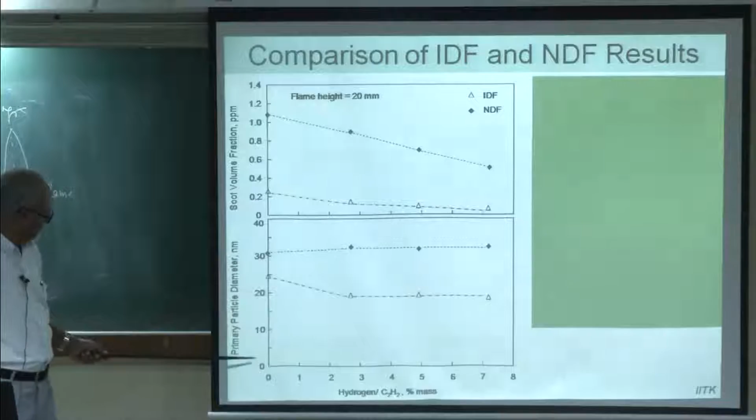This shows, at a typical flame height of 20, an overall comparison between incipient particles in IDF and matured particles in NDF. You can see the soot volume fraction is much lower, and primary particle sizes are smaller in IDF because they are drifted to the low temperature region. I already told you all these results.

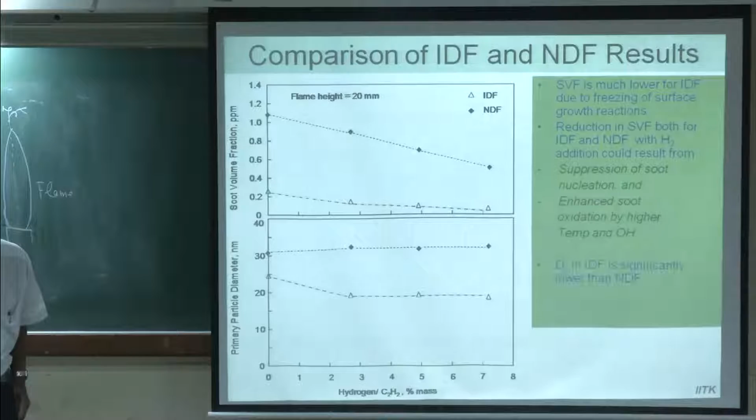Okay, let me just summarize that. You obtain about 30% smaller particle size in IDF - meaning incipient particles with hydrogen are smaller, because in IDF we get only incipient particles, they are not allowed to grow. But if they are allowed to grow, more deposition of material can take place - they remain in the high temperature region, then hydrogen addition does not make a difference to particle size. Particle size would remain practically the same.

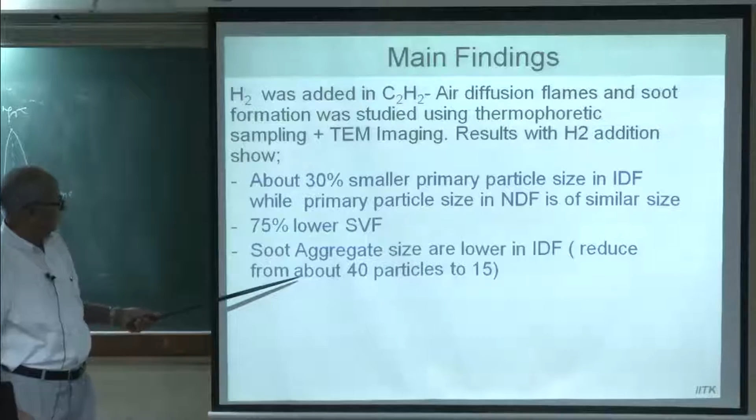SVF, soot volume fraction, is lower by about 75%, meaning it can be as low as just one-fourth. You can go up to 1/4 of the soot volume fraction without hydrogen. Soot aggregate sizes are smaller in IDF, going from about 40 particles to about 15, and it's all a function of lower SVF, because in IDF we have seen the SVF itself is about 1/5 to 1/6 of the NDF.

Aggregate size is smaller, and fractal dimension means the nature of the aggregate is similar, chain-like. Okay, I think this is all I would like to present now. Any questions?

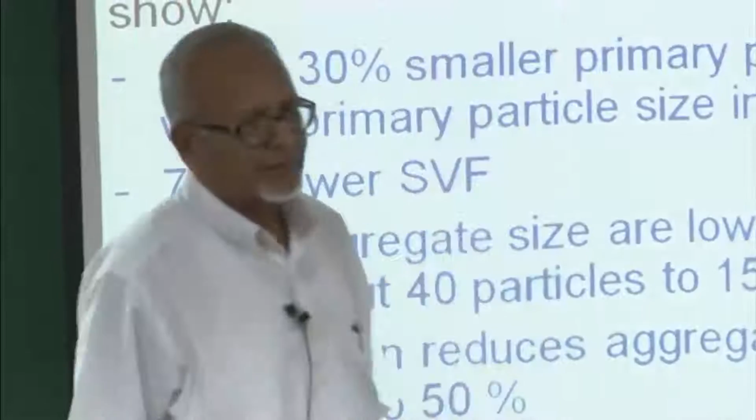What is the purpose? Giving the idea of what are the primary particle sizes you can expect of the soot, what kind of structures - it's a chain-like structure in most of the aggregates - and whether it's practical or not. But if you add hydrogen, then some benefits can be derived.

And primarily we planned, in fact, that if we can measure the hydroxyl radical concentration with hydrogen and without hydrogen, and link it with that. But money is always a problem.

We are talking on the experimental setup. Money is always a problem to get funds and all that. Sometimes it takes the sponsor also a lot of convincing - yes, this is useful, let us sponsor it - whether the institute is the sponsor, or the DST, or other sponsors. Okay, any questions?

Yeah. You are taking measurements using that grid, small grid. You say like 50 microseconds is the time when you take the measurement. So you are bringing something very fast to the flame and taking it back. So because of that, the flame structure may change?

No. You see, it's very small - this is the point, that it's very, very small. It's like a needle, very thin, of course 3 millimeter size, but it's not going like this - it's going flat. It's put in flat, not like this. So it goes very fast.

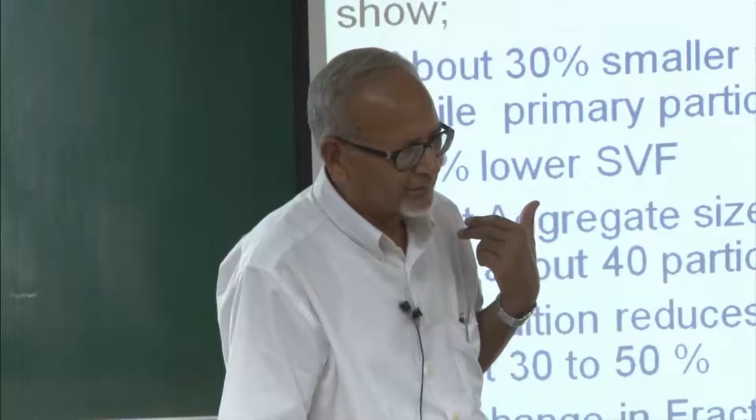So about 40-50 milliseconds. So in that, yes, some intrusion technique effect can be expected, but I think it's not significant, because whatever has formed, it will collect it, and whatever after-effect is created, it is not bothered about, and we are also not bothered about that.

Whatever it has collected has to be fast, because temperature is the driving force. So it should be cold outside, and the cold thing goes inside the hot region, then only it captures certain particles - as I told, thermophoretic means that principle. So whatever after-effect it has, we are not bothered about that.

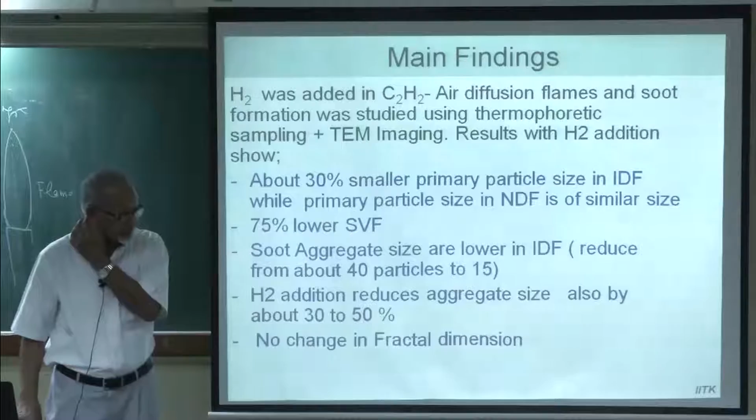How far from the flame would this be? Yes, it's a couple of centimeters outside, say that shroud.

You see, there is a nitrogen shield, and after that there is also a physical cover, so that in the room, if you have other things - for example you are moving, working there, and that disturbs the air, it also disturbs the flame. So that flame should remain absolutely stable, and so there is a physical cylindrical cover also outside. So it is just close to that. Okay.

Sometimes I read that there can be fragmentation as well, additional to the processes - surface reaction, oxidation. These all processes, it's easier to understand. Can you give, say, fragmentation reactions?

I don't think the soot particles can fragment. It's difficult to imagine how the formed particles can fragment. Did you observe any such things? Fragmentation - you mean the soot particles split into two?

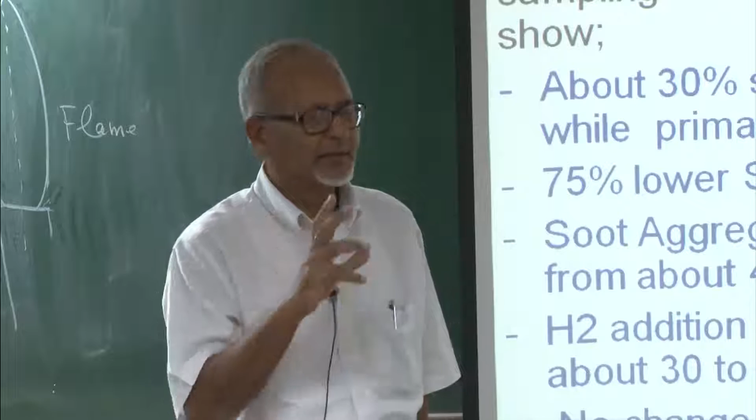No, particle size, as I told you, LII is based on reverse mathematics - you assume certain things. Most particle size determination techniques develop software by assuming the particle size and density. So particle size tells you the rate at which it gets heated and then cools off. The rate of cooling depends on particle size, surface area and volume. The overall intensity of light gives you total concentration, which becomes soot volume fraction.

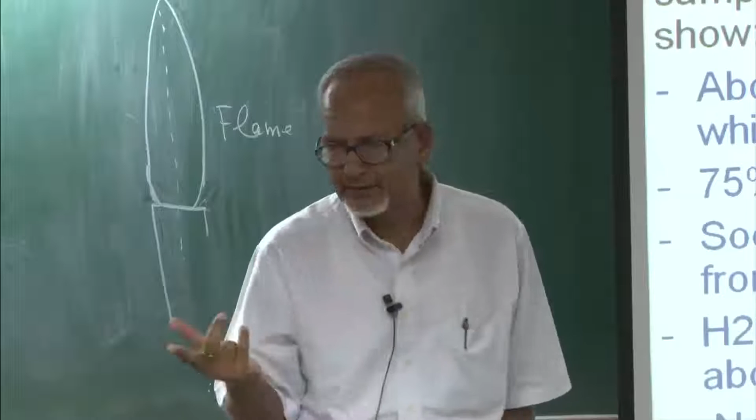So when you measure two things - one is total intensity, the incandescence, and the other is the rate of decay. The decay rate gives you particle size, and total intensity gives you soot volume fraction. So all these softwares for particle size determination use reverse mathematics - you know the physics and you fit: if I have this, then I should get that. They are generally based on fundamental principles and don't even need calibration.

If your mathematics is correct, which it is, you get both - the average number of particles. So is it possible? Has anyone ever measured the size distribution at a particular crank angle, or is it even possible to think of?

Yes, this is possible. It's a question of how much effort, and what exactly is the purpose? Because all these experiments are very expensive. You see the Dec group's papers from the 90s, and later Sandia people have been working on this. You read their papers and see how much effort goes in, and what exactly your objective is. Because if you look at the basic mechanism...

When you're working on a spray, it has been done - the Dec paper shows data after injection at 4 degrees crank angle, then 8 degrees, 10 degrees, 12 degrees after that. He has all the data given, he has done the analysis. Is that what you are asking?

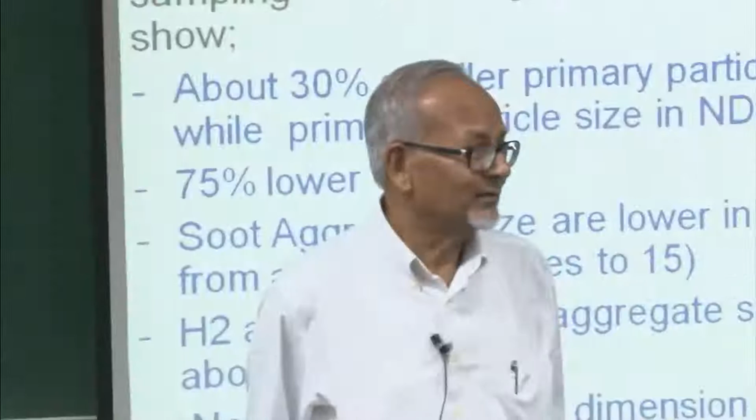And there are some size distributions possible for particles. There's also LIF - Laser Induced Fluorescence - that's another technique used for particle size. If LIF is used for spray atomization and droplet size, it can be used for particle size as well, so long as you know the technique of how to impart fluorescence to it.

LII possibly cannot be used for size distribution, because the decay would only give you an average particle size - the mathematics would be too complicated. But LIF's mathematics is already developed, because it's used for spray size distribution, for droplet size distribution in sprays.